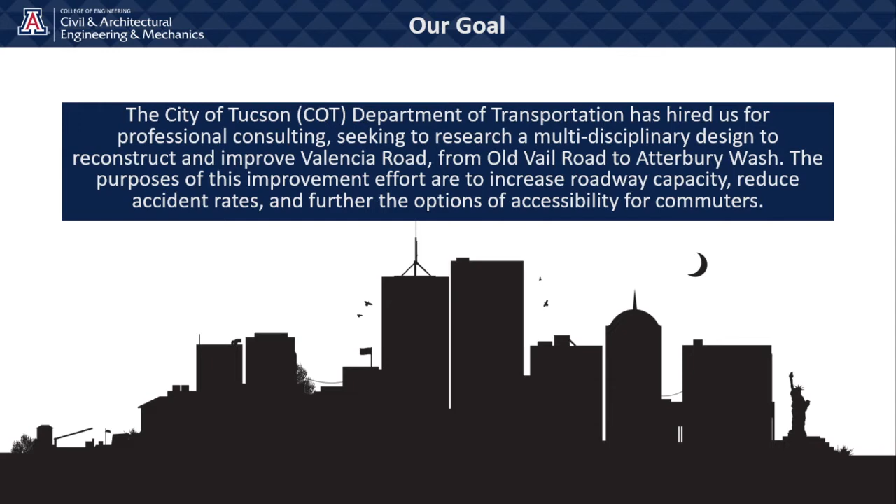Now I would like to take a few minutes to talk about the roadway report completed by Marwan Sami. The overall width of the right-of-way for this project is 150 feet, and the width of the typical section is 113 feet. In the western direction of travel, the proposed roadway improvements include the addition of 12-foot driving lanes, 6-foot multi-use bike paths, 10-foot paved AC paths, and 6-foot DG paths.

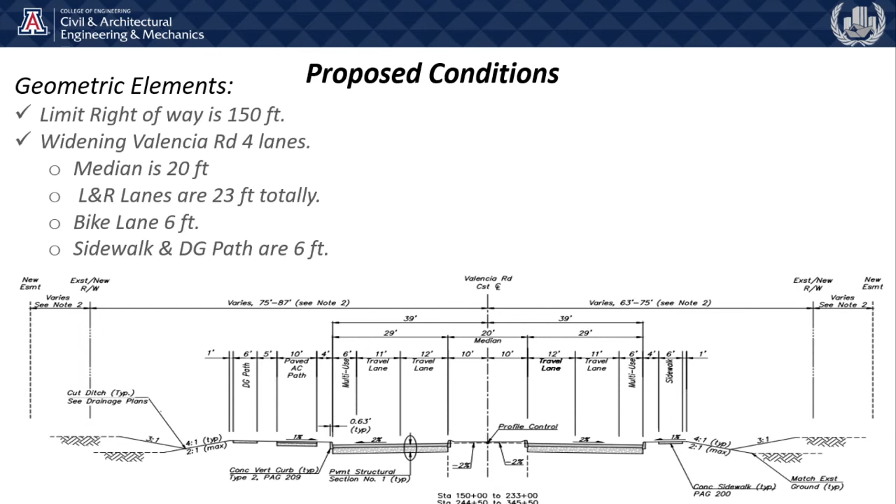In the eastern direction of travel, the proposed roadway improvements include the addition of 12-foot driving lanes, 6-foot multi-use bike paths, and a 6-foot sidewalk. The design also includes a curbed median of 20 feet in width. In regards to the level of service with our design, I'll be moving on to a traffic report that was completed by Ethan Harper. These are the results from the simulation model run in Vissim.

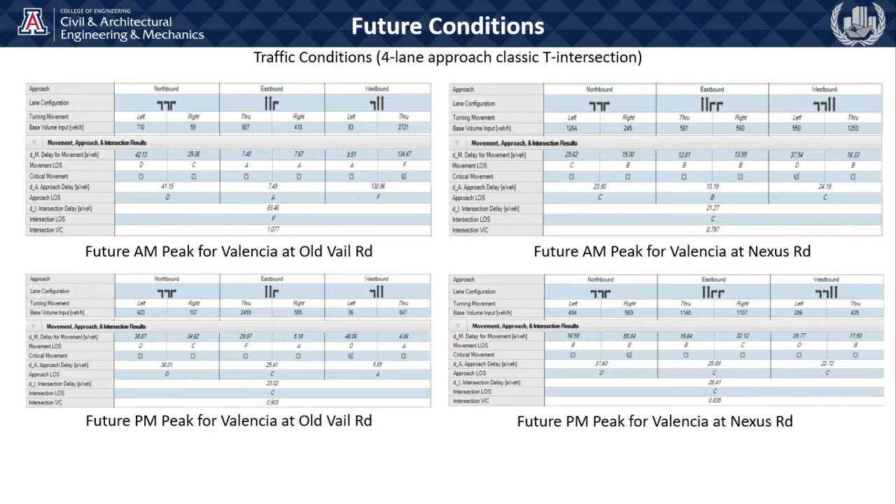With these results, we think it still is the best option to stick with a 4-lane divided roadway, sacrificing the movements during the peak of day. The 6-lane option will provide a roadway that is underutilized throughout the majority of the design life. Looking at the results on the AM future peaks at Old Vail, we see a failing intersection that can be focused in on a failing movement. With a delay of roughly 134 seconds per vehicle headed westbound, the 6-lane option might be considered.

Looking at the AM values for Nexus Road, we see the overall delay equivalent to a LOS of C, whilst the PM values at Old Vail provide another issue, with the failing movement being the heavy traffic coming eastbound at the end of the day. But the intersection still operates at a LOS of C. The PM values at Nexus are handled well, with only the northbound right turn having issues with a concerning LOS of E. The intersection itself is still projected to operate at a LOS of C.

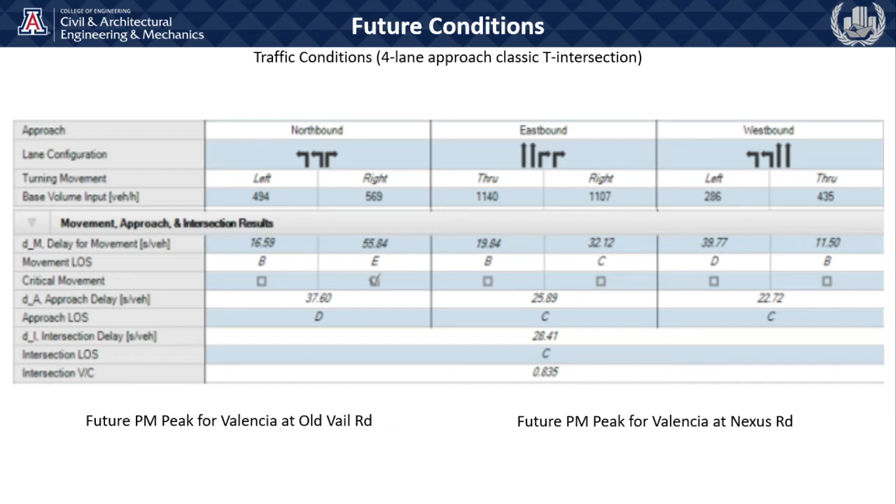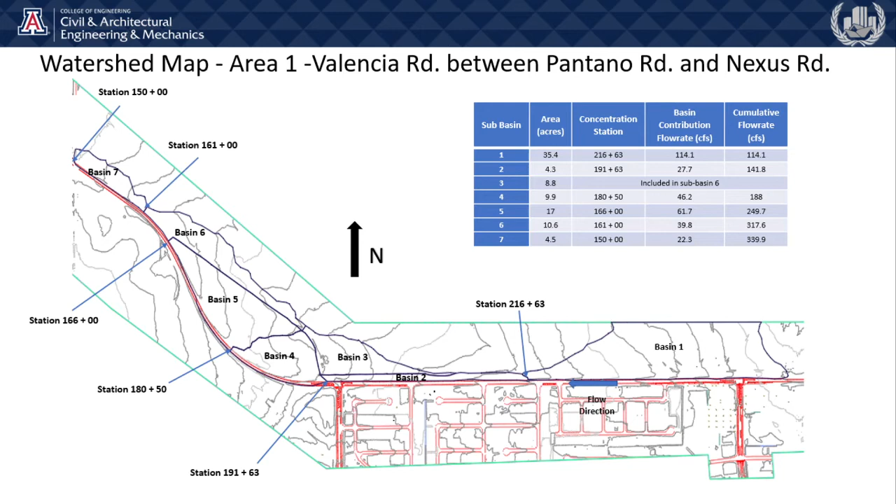This flow concentrates at 8 10-foot by 4-foot reinforced concrete box culverts that convey the water underneath Valencia Road. We recommend extending the existing culverts and replicating the current plunge basin at the outlet of the new system for protection and energy dissipation.

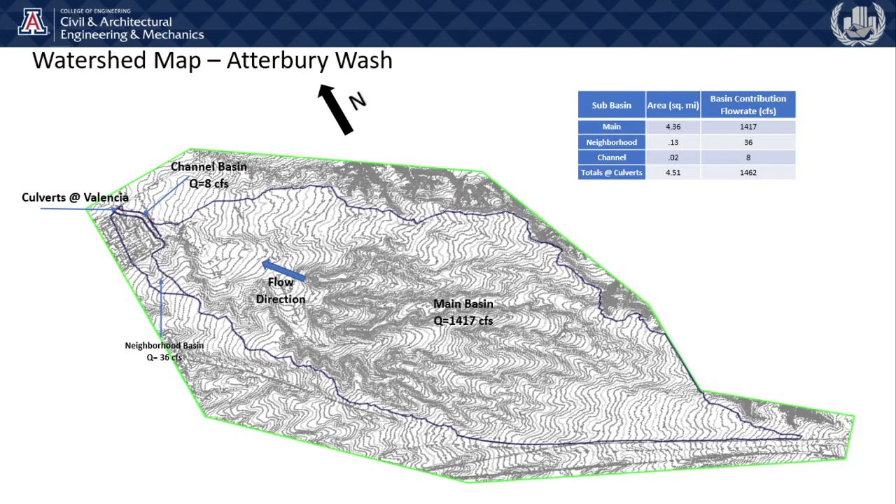Now let's discuss the geotechnical report that was completed by Alex Martinez. For geotechnical and pavement considerations, we focused on the existing aspects of the project soil and used that information to make logical recommendations. We first analyzed the site conditions at the surface and subsurface level to get a full overview of the project soil. We then used that information to provide general geotechnical design considerations that would have a substantial impact

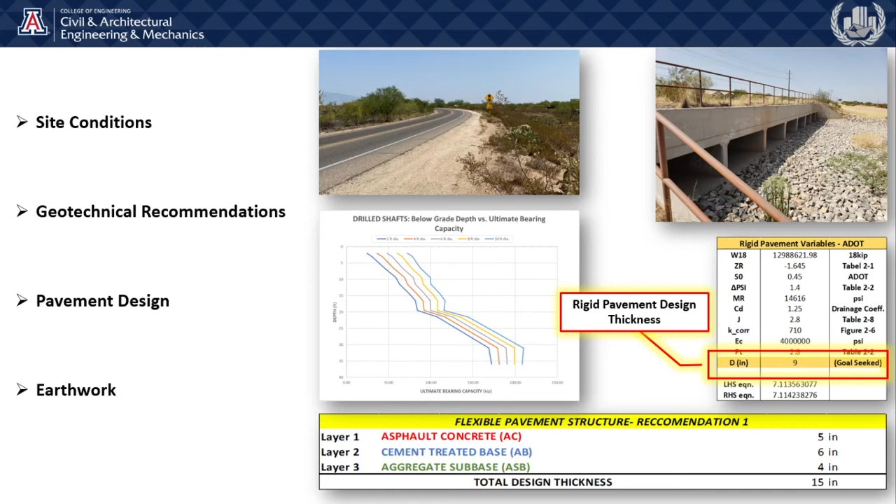on the project. Based on our understanding of the soil underlying this project, we designed pavement structures that would be exclusive for the project roadway. Lastly, we also provided recommended earthwork that would need to be executed to accommodate for proposed design changes made by Prime Construction.

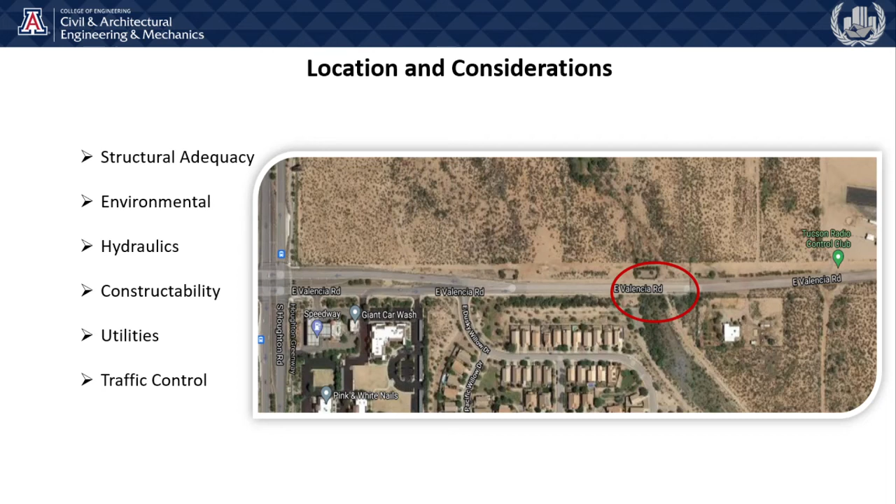Thank you, Ryan. Now I'm going to discuss the structural report that I completed. The main structural component for the Valencia Road Improvement Plan is located 1,700 feet east of the Valencia Road and South Houghton Road intersection within the southeastern section of Tucson. The current structure cannot support the development of the Atterbury Wash sector. Therefore, 3 alternative structures were considered for selection and design.

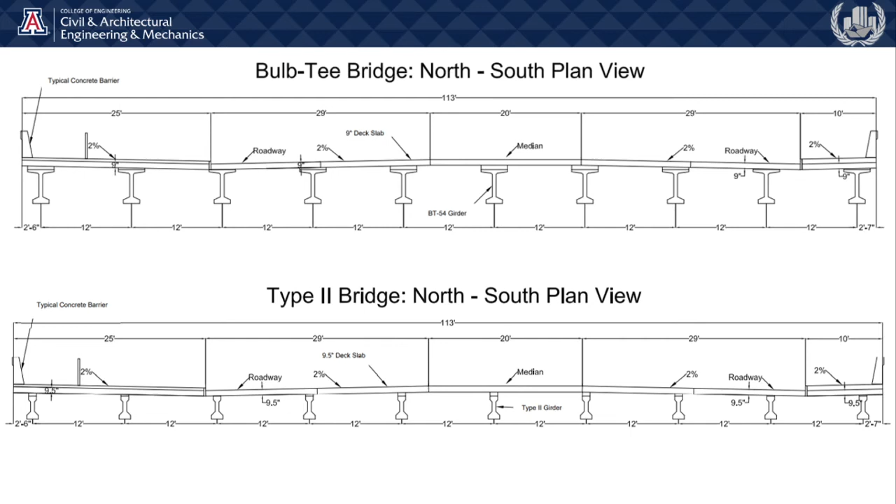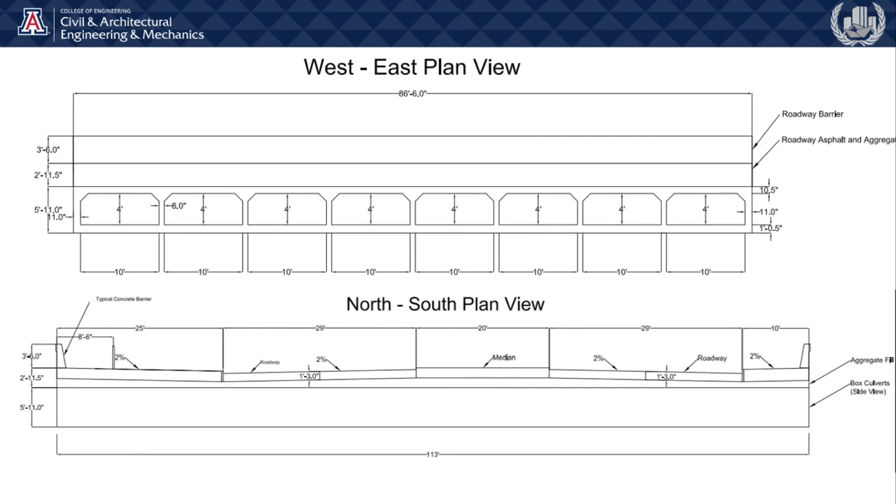Alternative 1 was a single-span bridge using bulb-tee girders. Alternative 2 was a double-span bridge using AASHTO Type 2 girders. And our third option consisted of a 42-foot extension to the existing 8-cell box culvert. Prime Construction weighed the pros and cons of each option through a comprehensive comparison as displayed in this table.

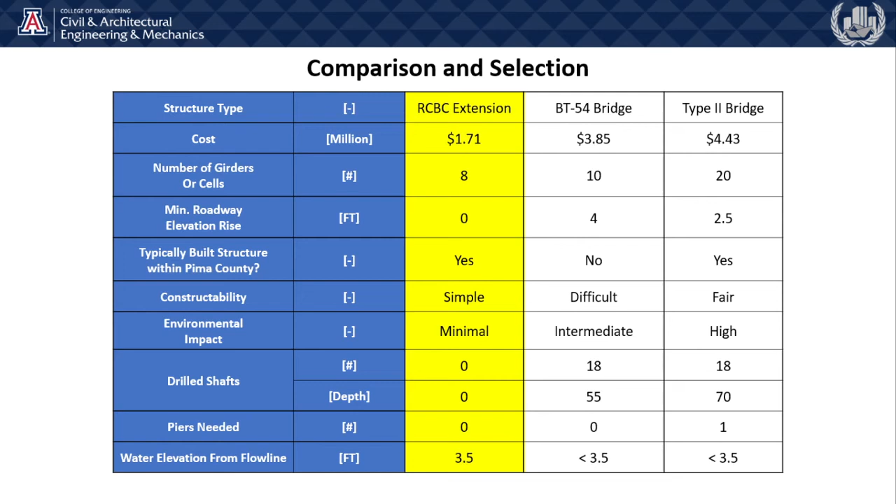The extension of the reinforced concrete box culvert has the lowest cost, did not require any roadway elevation changes, included structural components that were easily obtained through local means, had the fastest construction process, and the least environmental impact while retaining adequate water flow, making it our recommended choice at a price of $1.71 million.

Now let's discuss the environmental report that was completed by Valerie Gonzalez. So here at Prime Construction, we use the Envision program to measure the sustainability of our work through all the phases of all of our projects. Envision has 64 credits and is split into 5 categories. These are quality of life, leadership, resource allocation, natural world, and climate and risk.

Our goal for any project we do is to attain a gold level of sustainability, which requires a minimum of 353 points. We accomplished this goal by receiving 367 of the 882 total points. The categories that we have had most success in earning points in are quality of life, leadership, and resource allocations.

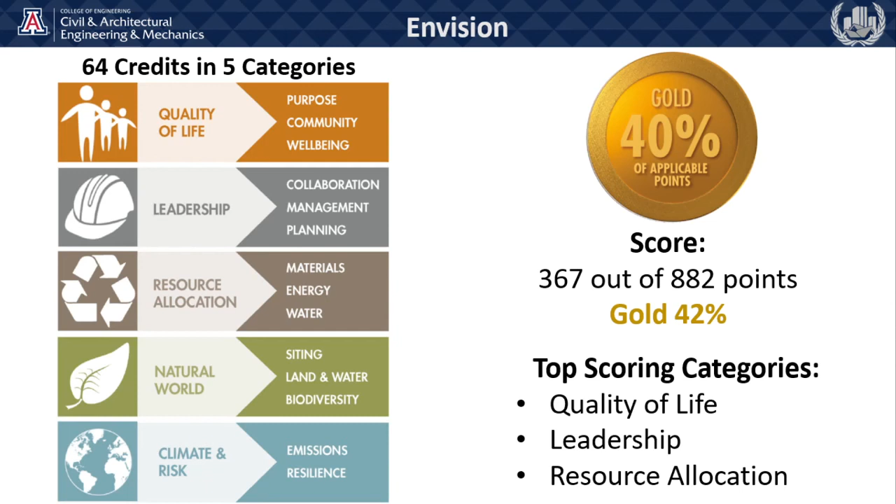Thank you, Ryan. Of course, no project design can be complete without discussing the budgeting schedule. The preliminary cost estimate for this project for the 4-lane section is $33 million, with the greatest portions of the allocated resource being roadway, site preparation, and roadside work.

This cost estimate includes contingencies such as events that are unexpected, as well as allowances for certain activities without an exact quantity, such as landscaping. And lastly, miscellaneous items like stormwater prevention plans, quality control, surveying, and maintenance and protection of traffic.

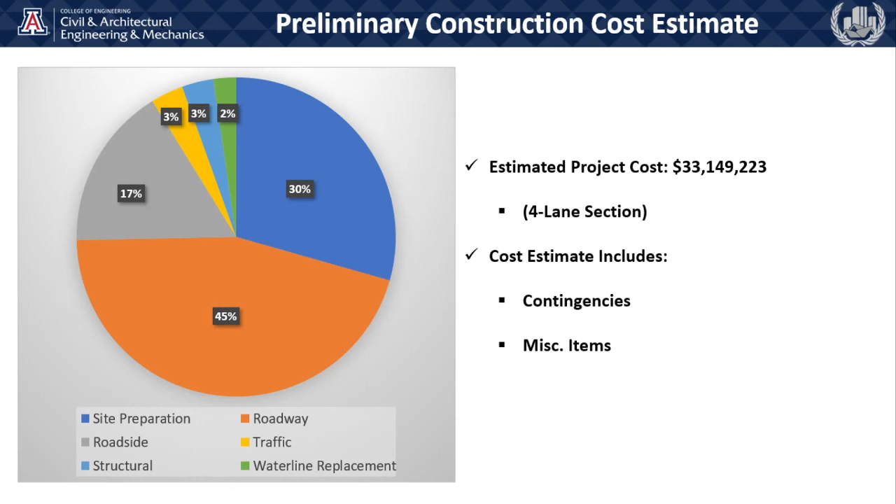A phased approach is proposed to perform work that will allow constructability of the scope of work. The scope of work can be divided into 3 phases, with the first 2 being able to be performed at the same time, 1A and 1B. 1A consists of main items of site preparation, temporary lanes, roadway and roadside work on Valencia Road from Pantano

Road to Old Vail Road. Phase 1B consists of main activities including site preparation and culvert extension on Valencia Road at Atterbury Wash. And lastly, Phase 2 will have main work items including those of Phase 1A, but performed on Valencia Road from Old Vail Road to Nexus Road.

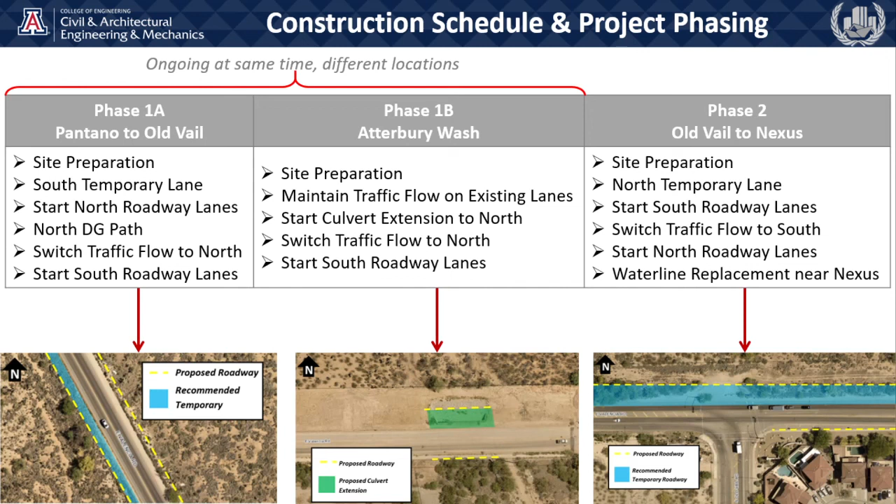With that, thank you so much for listening to our presentation. We hope that with this project and its further development, we will be able to lead to a safer community and a better Tucson. Thank you.